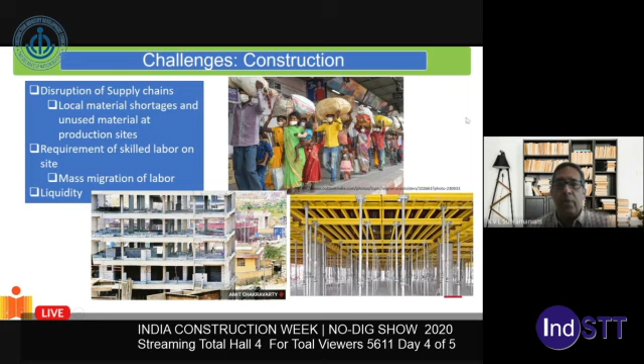The third most important problem faced by the construction industry was liquidity. Essentially, money disappeared from the market, and the construction industry in India tends to be more cash-driven. That economy was severely impacted by the lockdown.

Now, it was basically a scenario that played out over a period of 6 months. Starting from the lockdown, when migrant labor was forced to leave the construction sites, construction stopped, and material supply chains were disrupted, so material could not reach the construction sites or even the cement production units. So cement production and other ancillary support units also came to a stop.

But from this lockdown, I think there is a chance for us to re-strategize construction. What I see is an opportunity for us to look at construction and identify issues that will help us develop solutions. So the need of the hour is for us to pause and rethink some of the strategies we've used for construction over the ages.

At this point of time, I'm restricting myself to an India-specific scenario. In India, construction is a large employer, employing a large number of people, and the employment base is primarily low and semi-skilled labor. It's a mass employer of people with a limited skill set, and there is relatively low technology adoption in construction. These are things one has to keep in mind.

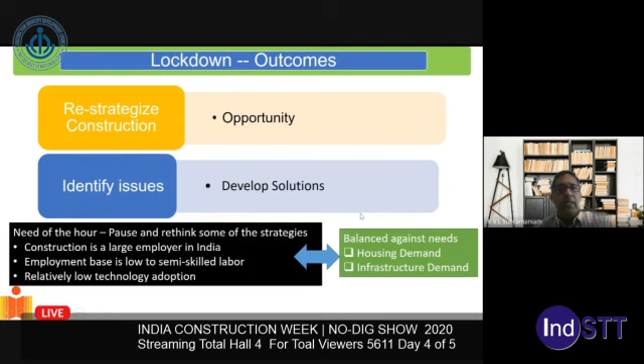Some of the solutions I'd like to throw out there, since we're talking about post-COVID recovery, is to talk about local utilization of material.

We have a lot of material, and now with the advanced production that we do, we rely a lot on supply chains, and oftentimes material is sourced from different places. The production of something like cement takes place in a different location. So we need to look at materials being used for products, and probably look at more local utilization of materials, so that we can get away from or have a parallel system which can be sustained by local development, which does not depend upon the supply chains which bring in material from large distances.

We need to look at employing labor locally. This whole problem of labor migration would mean that if we can create employment in construction locally. Now, of course, the issue is that typically labor migrates from a rural setting to an urban setting, because most of the construction is in the urban setting. So how can we employ labor locally?

We need to look at production which supports construction. That's what we need to look at. So look at more prefabricated products made with local materials, which can be done in a rural setting, so that these serve to support the construction in the urban centers.

We also have to look at efficient construction, with reduction in labor-intensive processes at the site. These have to be supported by back-end production, which can then be done locally in the rural setting.

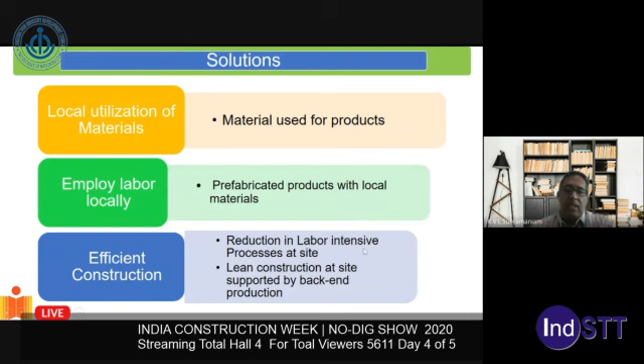So this is the kind of model we probably have to think about, where we keep our employment base still large in construction, but have a lean construction site where we look at more prefabrication, more precast materials being used, which also speeds up construction and makes the entire process more efficient. Therefore, we are looking at a faster turnaround of constructed products.

So what I'm going to do now is present on some of the opportunities and solutions of three specific things we have worked on. The first is the use of excess fly ash locally in precast and prefabricated products to support construction infrastructure. I'll present this in more detail in the next few slides.

India basically produces more fly ash than it can consume, and most of it is not being used in urban centers. So we have this construction material which can be utilized locally to produce precast elements and structural elements. Rather than move the fly ash across the country, use it locally to produce these precast elements right next to where it's being produced, which happens most of the time in rural settings. Those can then be used to support construction happening in the urban centers.

Then we are looking at local production of units using local materials, which basically are a value add and provide employment. In specific, I'll talk about stone panel technology, which uses excess stones produced locally in one specific geographic location in the southern part of India, to produce precast floor panels. These precast floor panels can be deployed very rapidly for providing flooring in urban construction, in precast construction.

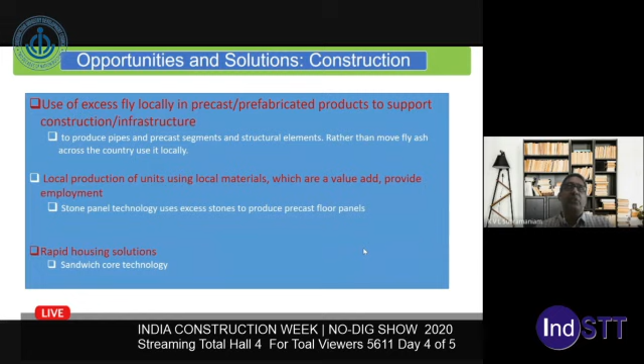Then the last thing I'll touch upon briefly is rapid housing solutions, because we do have a great demand for housing. I'll quickly present on the sandwich core technology, which can also be looked at for providing solutions for housing. Now, a quick background: cement, past, present, and future.

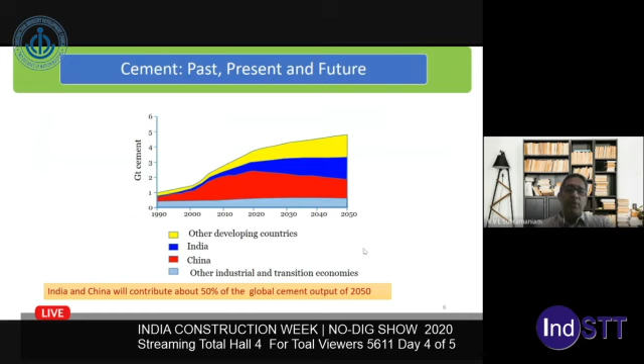India is right now the second largest producer of cement in the world, but our projected production in 2050, if we continue at the same trend, will make us the number one producer of cement in the world. Some of the challenges we currently face with cement production are that our current limestone reserves are expected to last only 30 to 40 years. The energy requirement for cement is also quite large, and that is one of the issues that has to be addressed. And the carbon footprint, of course, remains to be an issue.

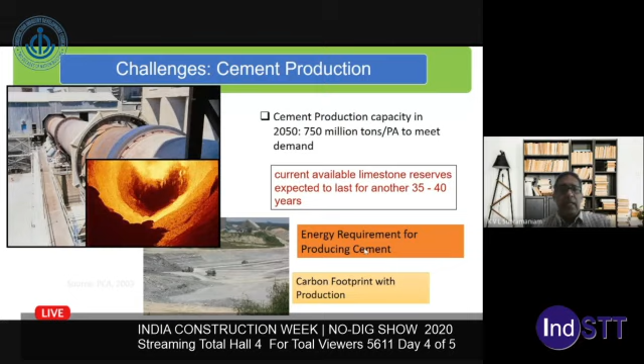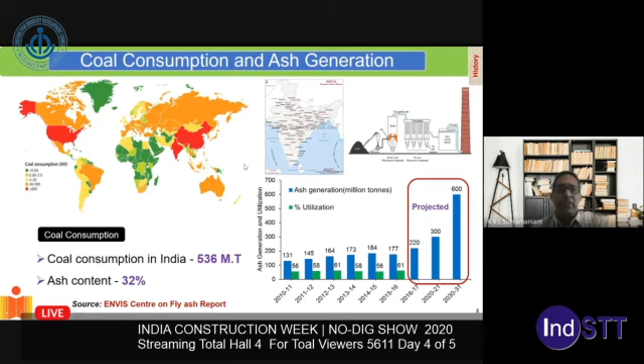But what we did initially, to come up with solutions, we first wanted to understand this fly ash. So fly ash was collected from different power plants across the country and it was analyzed. What we found is that, if you look at just the oxide compositions, there is a very small difference in the oxide compositions of this fly ash.

But when we started using this fly ash in concrete, we found that the results were night and day. There was a big difference in the final strengths, the final properties that was achieved with these fly ashes. So to understand that, we had to do a higher level of characterization.

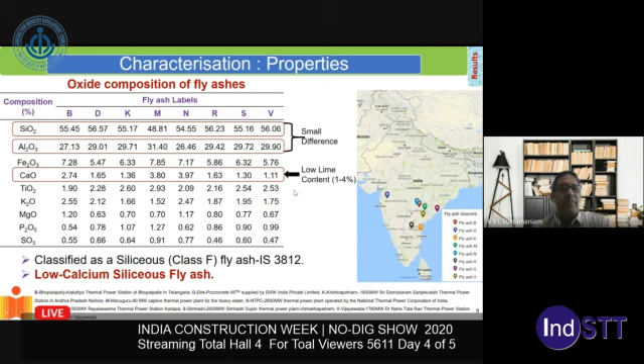The one unique thing about fly ash produced in India, or I should say predominantly produced in India, is that most of it has very low lime content. It's very, very low. So most of it is class F fly ash.

Now what we did is, from characterization, we established the reactive silica and the reactive alumina in the fly ash. These are the two reactive elements in fly ash which are most beneficial for use in cementitious systems or in alternate binders that are being produced nowadays.

Now, if you look at the same 8 fly ashes, the blue bars represent the total oxide contents of the fly ash, and the green bars represent the reactive oxides. So if you see here, the differences start showing up. While the blue bars are almost comparable for all fly ashes, in the green bars there are a lot of differences in the reactive oxide content.

First thing to note here, the reactive content is much smaller than the total oxide content. That means only a small portion of the total silica and total alumina in the fly ash is available in a reactive form. It can be as small as 13% of the total silica being reactive, and about 7 or 8% of the alumina being in the reactive form.

So this is a lesson for us, where we realize that the fly ash—whether it is the production process, the boilers that are used, the temperature of processing, or the collection—there is fundamentally very low reactive content in the fly ash we're using.

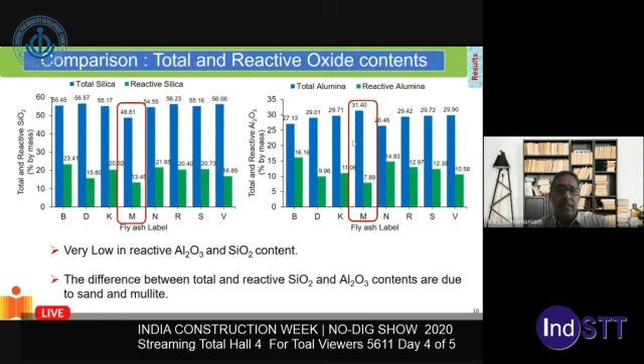Our next step was through this characterization. From XRD-based analysis, we found that most of the fly ash is basically oxides—silica and alumina—locked in crystalline material. If you look at this XRD graph, a lot of the fly ash is locked in crystalline content of quartz and mullite. Quartz is sand, which is very unreactive. So a large percentage of the fly ash is locked up in these unreactive forms.

Basically, the reactive form is this glassy phase, shown here in orange. That is what we are interested in, but that content is low.

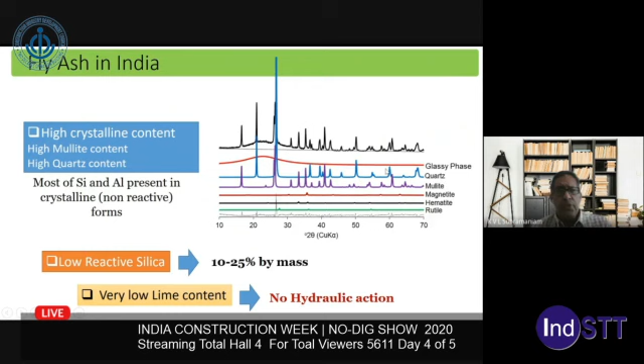So our next step was to look at the possibility of producing geopolymers with this fly ash. For geopolymer production from a given fly ash, it is the reactive silica and reactive alumina that are important. You take the fly ash, activate it in an alkaline solution containing dissolved silica, and when you subject it to elevated temperature curing, what you end up with is a geopolymer—basically a densely cross-linked network of silica and alumina, as I've shown here.

This geopolymer, if produced from alkali activation of fly ash, particularly low calcium fly ash, tends to have much higher strength than cement. It is much more durable and has very good fire resistance. So basically, it is an ideal material for construction. The only problem is, of course, the temperature.

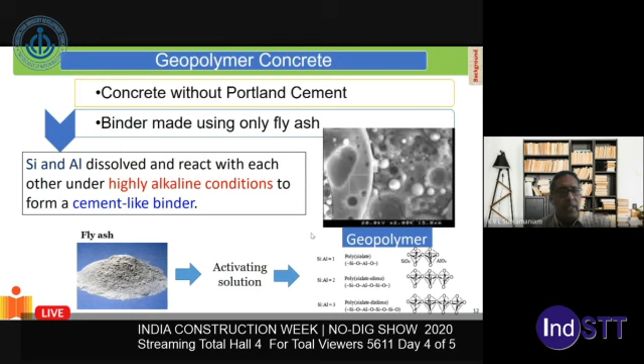So now, understanding the chemistry of the fly ash, we developed a process using this low reactive fly ash, which is predominantly available in India, by optimizing the chemistry—determining the reactive oxide contents, optimizing how much activators need to go in, with activators primarily provided as sodium silicate and sodium hydroxide. Understanding the role of these in the entire reaction chemistry, we've been able to produce geopolymers which consistently give us strengths of about 80 megapascal.

We've also reduced the temperature demand for curing down to 40 degrees Celsius, which is the common temperature in summers in India. Basically, 6 months of the year, the high temperature in most of India exceeds 40 degrees. So we're able to achieve a binder that gives us 80 megapascal strength using fly ash, a waste material, and this entire process has been developed by understanding the chemistry of the process.

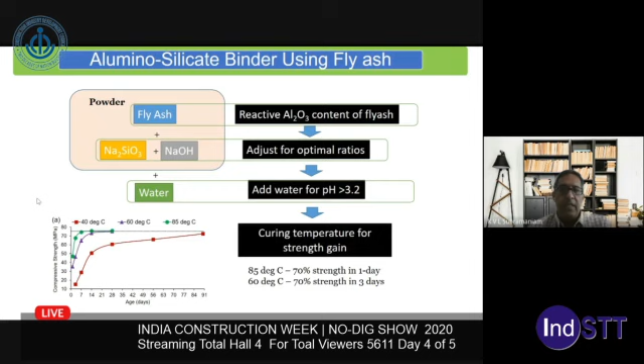From there, we are now able to collect fly ash from different thermal power plants and optimize the activator for this, producing cements which give us consistent strength and consistent properties. This is done following the characterization of the fly ash obtained from these thermal power plants. This cement would produce a geopolymer that consistently gives high strength and high durability.

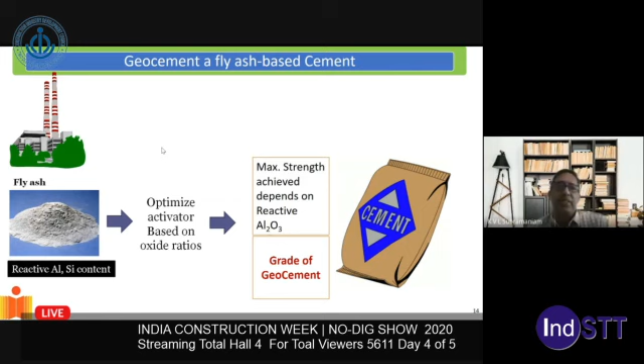So while we are looking for support—this is fly ash being produced across the country, mostly in rural settings. We are now looking to see if this material could be used to support infrastructure development.

Steam curing can easily be adopted, and it is already being done for producing a lot of construction-related products. If you look at conventional steam curing, we basically raise the temperature to about 85 degrees Celsius, hold it there for 6 to 10 hours, then cool down the product. This is the ideal temperature for geopolymerization to happen.

We can actually accelerate the geopolymerization and deliver the strength much quicker, as I had shown before. Because these geopolymers produced from fly ash have very high acid resistance, they are an ideal candidate for making precast pipes, which can be used for sewage and even for transporting water in urban settings.

So here is an idea of a precast product that can be made close to the thermal power plant and used to supply demand in urban centers, or the requirement for infrastructure in urban centers. The other thing is also tunnel liners.

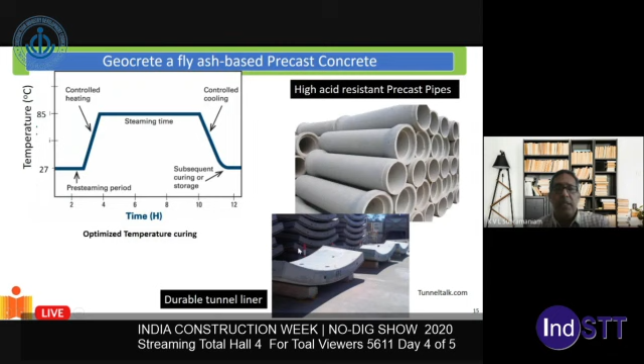These are tunnel liners that are used to stabilize tunnels, and these tunnel liners can be quickly made out of geopolymers and can be used to support infrastructure development.

Another product we're working on closely with fly ash is developing cellular masonry blocks, which provide enhanced building envelope performance.

India is a hot tropical country, and it's important to keep the heat out of our houses. Most of the heat gain into a house happens through the walls, so what we can do to reduce heat gain involves developing walls which have low thermal conductivity.

We are interested in developing these bricks, which are used as infills inside a reinforced concrete frame. They form the outer envelope of the building, which is exposed to the outer environment.

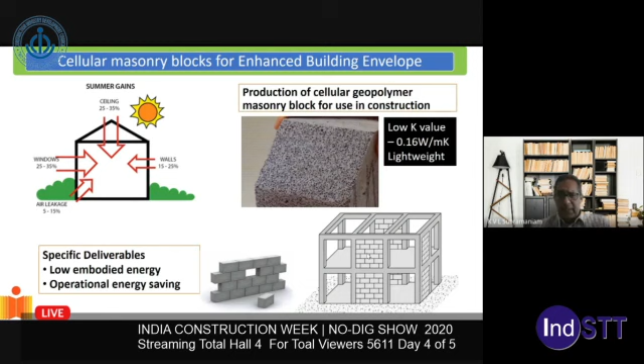These bricks are currently made of autoclaved aerated concrete blocks, which have low thermal conductivity but are made of cement. In this process, air is entrained in the cement-based matrix in the form of tiny bubbles, and the entire cement block is autoclaved, producing the autoclaved aerated concrete block.

This AAC block is then used in making masonry, which forms the infills between reinforced concrete frames. What we're proposing is to use the same autoclaving process, but instead use geopolymer-based blocks.

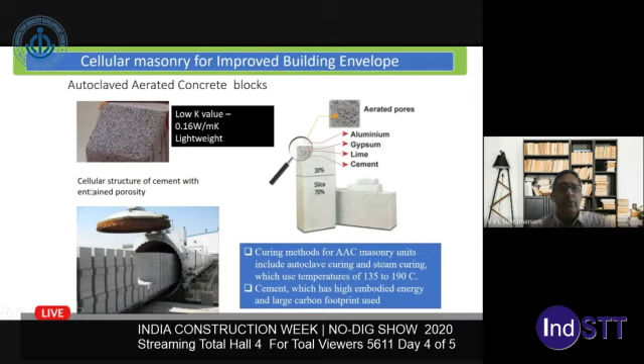So we can use this fly ash, which is alkali activated with optimized binders that deliver high strength. We entrain it with porosity in the form of tiny bubbles, autoclave them, and produce masonry blocks.

We're even thinking of making wall panels, which can be used as infills. This is technology that can readily be developed close to the production of the fly ash itself, employing a lot of labor close to where the panels are produced.

So these are a few things we are planning with fly ash, which decentralizes production, takes it closer to where the fly ash is being produced, and generates employment in construction-related activity close to where the fly ash is being generated.

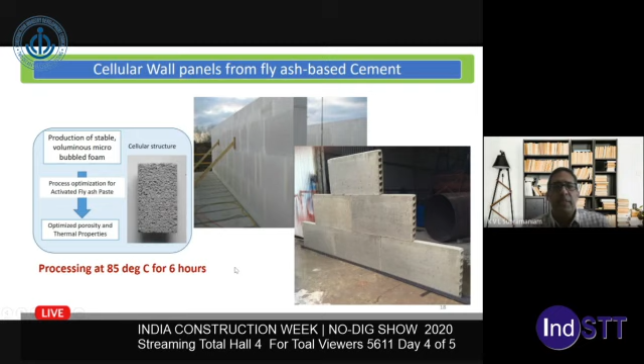The other two things I wanted to talk about are, one, using local materials for construction. Here's a specific example of what we worked on with local materials. One of the common things found across India are stones.

Stones are abundant in India, and stones from specific regions like Tandur, Kota, Makrana are world famous for their quality, and have been used traditionally for different forms of construction.

During the production of these tiles, used in construction as floor or wall tiles, a lot of waste is produced. So we were looking at developing solutions to use up this waste, and to deliver a precast construction product that could support construction.

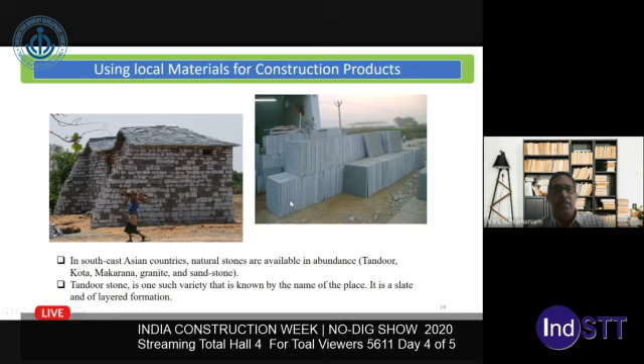So we came up with this innovative, eco-friendly precast natural stone composite floor system. Here we have the natural stone slab, cast in a ferrocement bed and supported on joists - this is a precast unit made with these floors.

With the stone slabs - initially we were using square or rectangle cut stone slabs, but now we've moved to using irregular shaped stone slabs, which are essentially waste from the stone industry, to develop these precast floor joists.

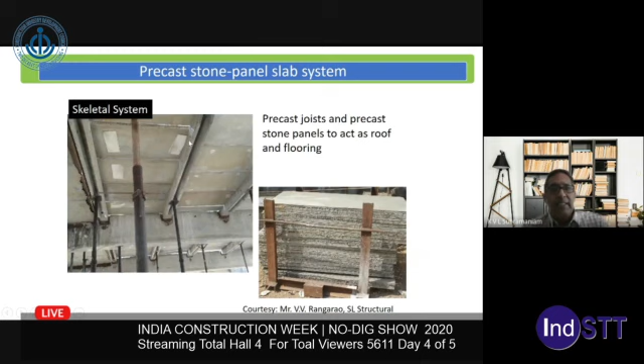These precast floor joists can then be used directly to assemble the flooring system at a very rapid pace, in a totally precast manner. This is the assembled floor where all the slabs have been assembled.

They're simply leveled, giving a very quick flooring system developed using these stone panels, produced in one of these rural pockets in India. The whole point is to set up a precasting unit that produces precast wall panels and precast slab panels, which could then be used in urban centers to meet flooring and wall panel requirements.

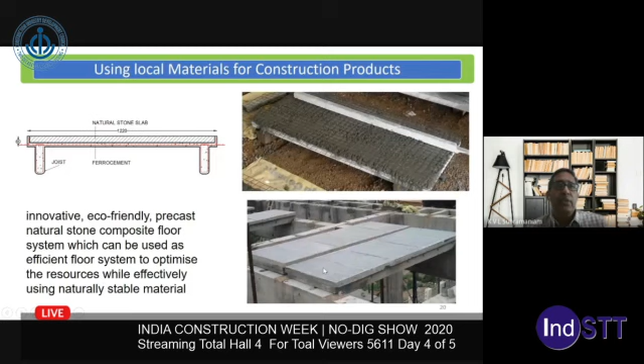One advantage of these floor panels is that because the top surface is stone and can be polished, no finish needs to be provided. The natural surface of the stone can be used as the finished surface, saving material in the process. So the stone acts as a structural material in this precast panel, and also provides the finished surface after construction.

The production of these precast panels is done in this rural part in Tandur, and the finished floor panels are shipped to the city. One example is where they were shipped to Hyderabad and used for construction there. So we are able to generate employment in the rural sector where labor had migrated to, while keeping the construction site in the urban center clean by adopting precast technology - a leaner construction site in the urban setting.

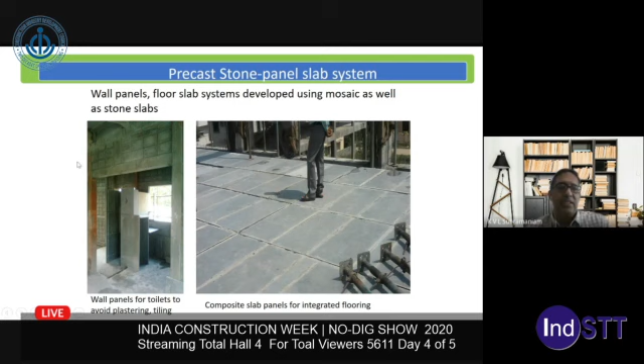Just to show you some photographs of this integrated precast beam column system with the slab wall, with the stone panel system that was used as floors.

Now, the final thing I want to talk about is the 3D reinforced system for walls and slabs. This is the wall panel system and even a slab system that has been developed, where we have a 3D integrated wire mesh with a core made of expanded polystyrene (EPS). Layers of concrete are cast on both sides of this EPS core, with wire mesh reinforcement on both sides serving as reinforcement for the concrete layers.

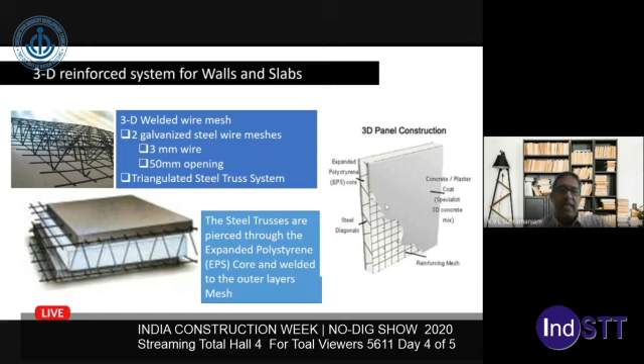These integrated 3D wire mesh reinforcements of the EPS core are assembled in the form of walls or slabs, and simply by concreting the two layers, the entire structure can be built. This is being used a lot for prefabricated low-cost housing. The sandwich core technology has the advantage that because it has an EPS core with very low thermal conductivity, it provides very high thermal comfort.

Of course, the current limitation is that it's limited to small spans and simple structures. So it is ideally suited for modular construction, and it's a great potential solution for the housing problem in India, where we have great demand for housing, both in the urban and rural sectors.

So what is the advantage of this particular 3D reinforced EPS sandwich core technology? First, we can use local masons - labor that has migrated from the cities to rural areas can be employed to make these panels. These panels could also be used as precast panels for construction, so production takes place wherever the labor is or wherever they have moved to.

It provides very rapid construction, has high thermal comfort, and overall it's a lightweight construction, so there's saving in materials.

These are the three things I wanted to present that are India-specific potential solutions for this post-COVID disruption that was created. The majority of the disruption had to do with migration of labor, where labor moved from urban centers back to rural areas. The goal is to clean up the construction space so that urban settings become more efficient, with leaner construction and less labor, while keeping employment in the rural sector by providing opportunities there - support structures made there, shipped from rural to urban centers, and used for construction.